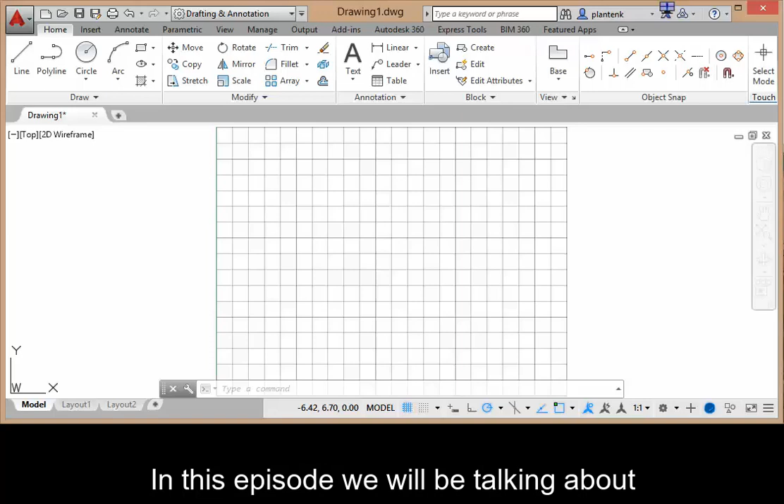In this episode, we will be talking about the difference between absolute and relative coordinates. Absolute coordinates are measured with respect to, or relative to, the current origin, whereas relative coordinates are measured relative to the last coordinate entered via the keyboard or mouse.

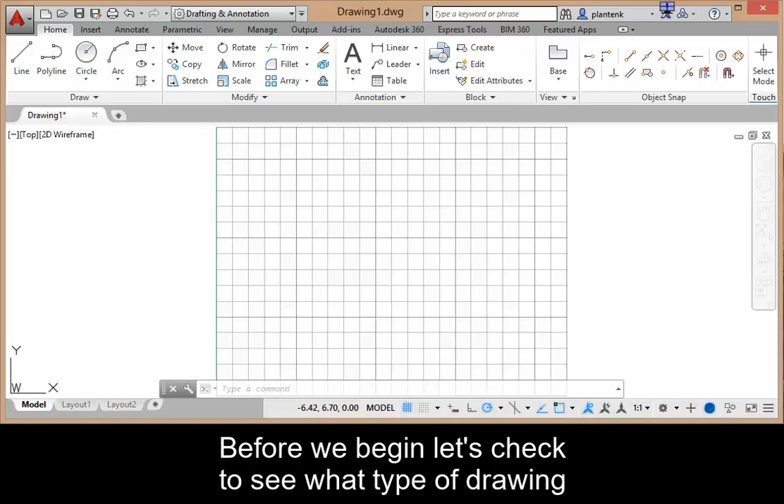Before we begin, let's check to see what type of drawing we are in by using the commands units and limits. Units checks what type of units we are using and the precision. Here we can see that we're using inches and the precision is 2 decimal places.

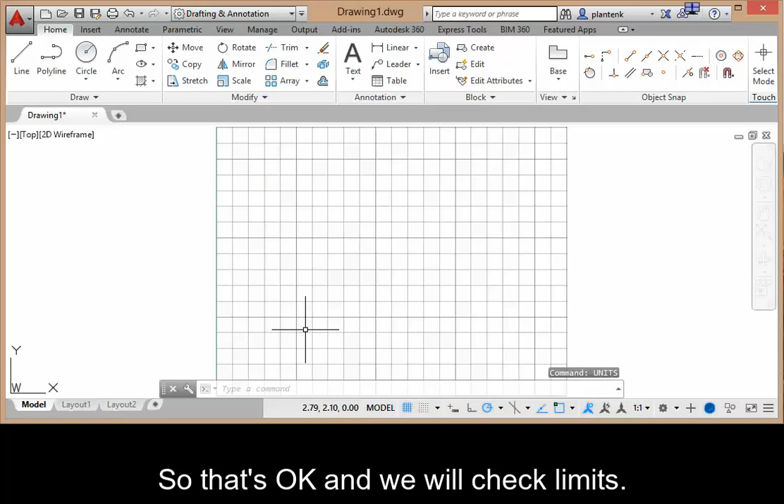So that's okay, and we will check limits. This command checks the paper size, and the lower left corner, that's the origin, so that should be 0, 0. We'll leave that. And this is 11 by 8.5, which is the normal paper size, so we'll leave that.

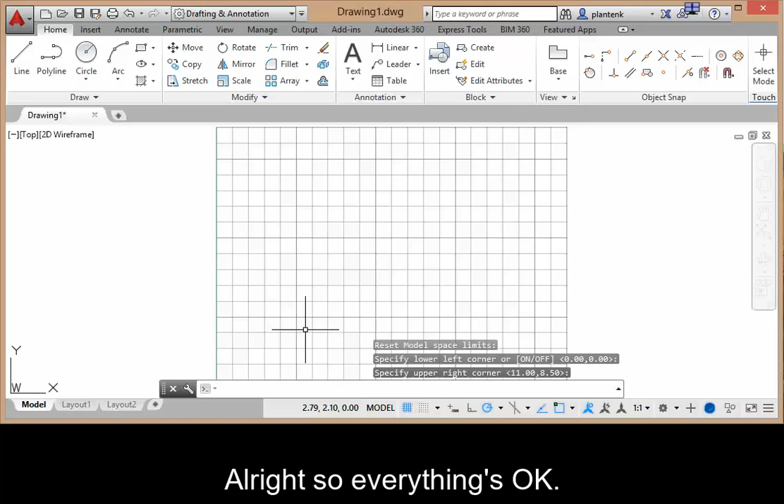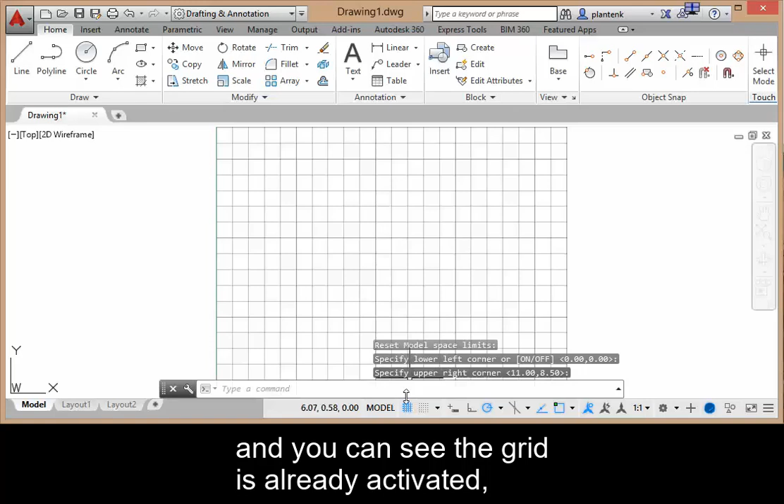Everything's okay, so let's start by visualizing the coordinate plane. AutoCAD gives us the option of showing a grid, which places lines or dots at selected coordinate points. Let's go down here in the status bar, and you can see the grid is already activated. We can deactivate that by clicking on this icon here and activate it again. So you can see here's the grid, and we can change the size of the grid.

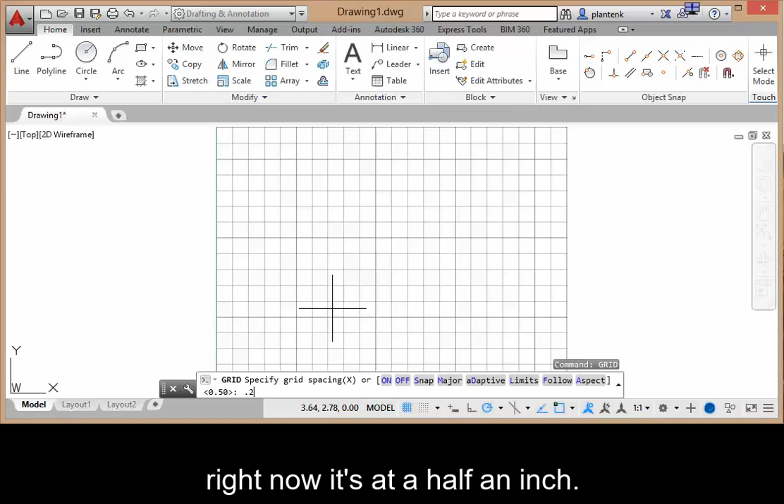I'll just type in grid and choose any size you like. Right now it's at 1/2 inch, so I'll put 1/4 inch, and you can see that it changes size. The status bar gives us a quick way of turning that on and off.

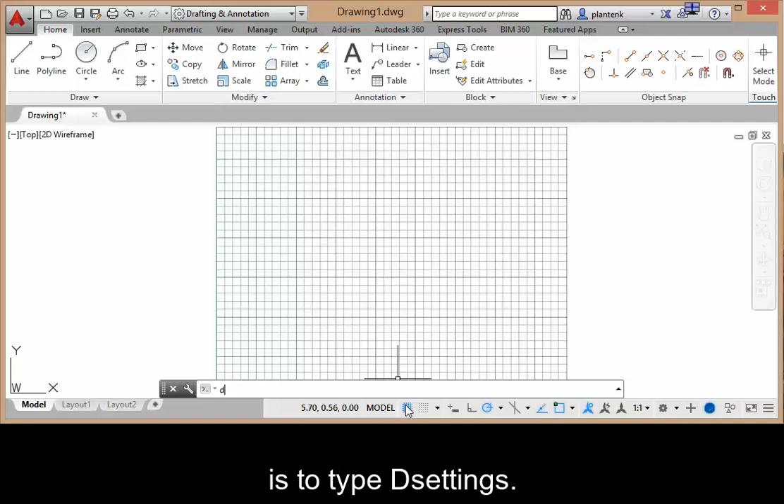If you want to change any of the settings other than the size, an easy way to do that is to type DSETTINGS. This gets you into the drafting settings window, and in the snap and grid tab, you can see there are snap options and grid options.

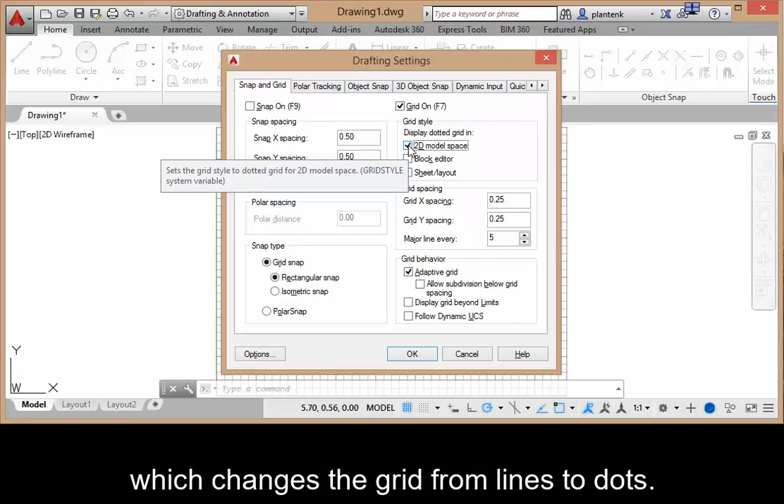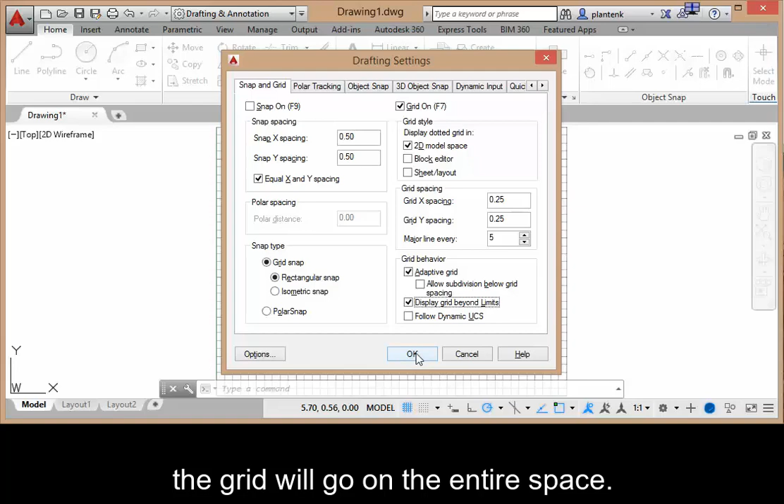This allows you to go to the 2D model space grid, which changes the grid from lines to dots, and it also allows you to display the grid beyond the limits. Right now the grid only goes on the limits, or your paper size, so you can see the grid does not go beyond that. But once we click this to be active, the grid will go on the entire space. I'll go ahead and click OK, and you can see the grid just spreads out beyond our paper space.

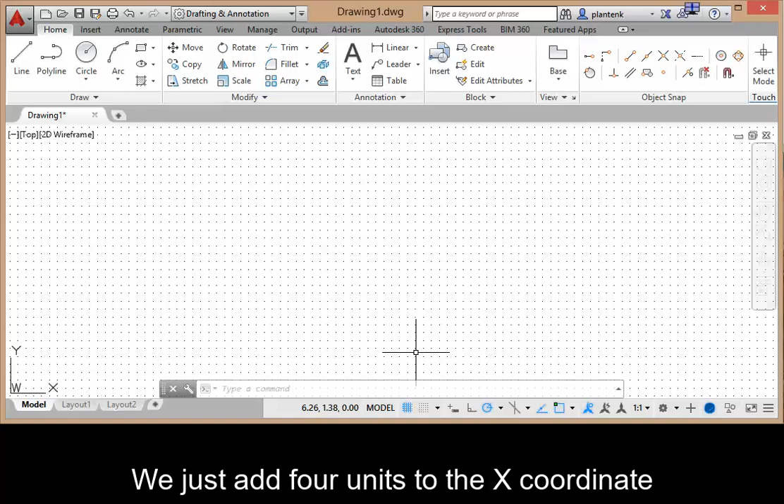Let's move on and continue to talk about the difference between absolute and relative coordinates. Let's say that I want to draw a horizontal line that is 4 units long. If I start the line at the coordinate position 3, 3, then it's easy to calculate what the endpoint would be. We just add 4 units to the x-coordinate, and the endpoint would be 7, 3.

So let's go ahead and do that. I will draw a line. My first point is going to be 3, 3. And the last point will be 7, 3, giving us a line that is 4 units long.

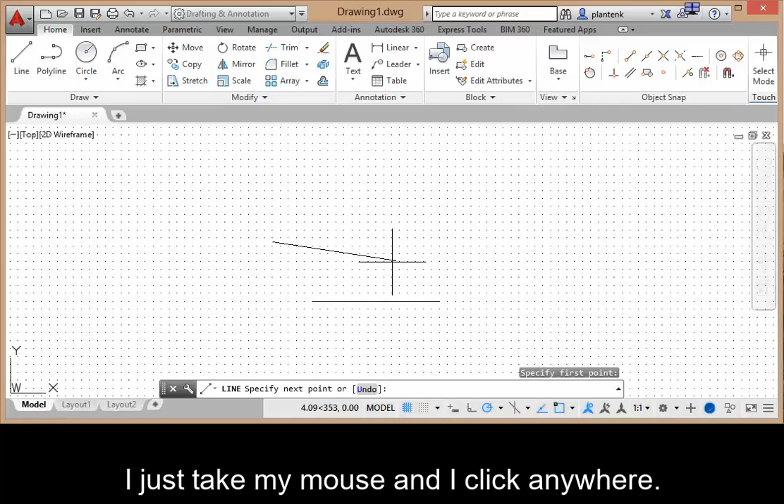But what happens if I don't know where my line starts? I just take my mouse and click anywhere. Now I have no idea what the end point should be, but I still want the line to be 4 units long. This is where relative coordinates come in handy, because now I want to draw something relative to my last point entered.

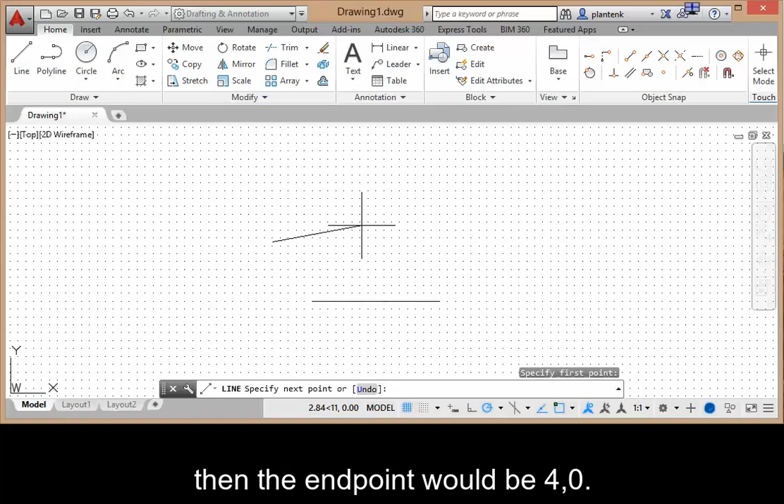So if it's relative to the last point entered, then the end point would be 4, 0 -- 4 from the last point. But how do I let AutoCAD know that I want it to be relative to the last point entered and not to the coordinates? We use this handy little symbol, at, the one above your 2. That tells the program that it's going to be relative.

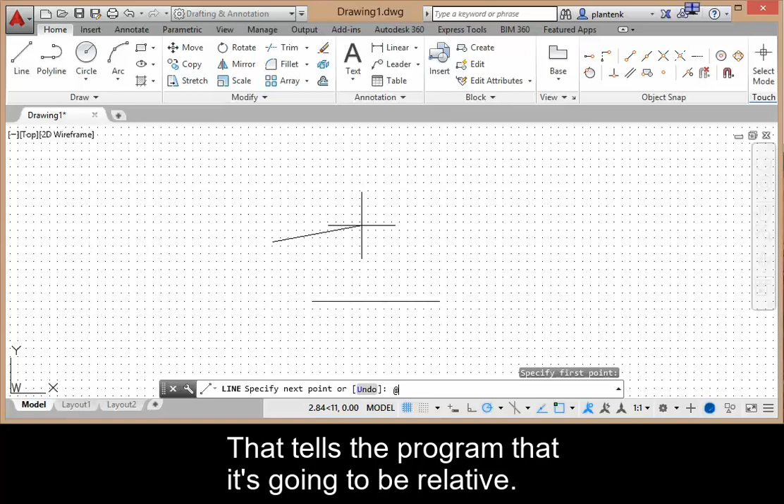So now I can just go 4, 0, and that gives me a relative coordinate, relative to the last point.

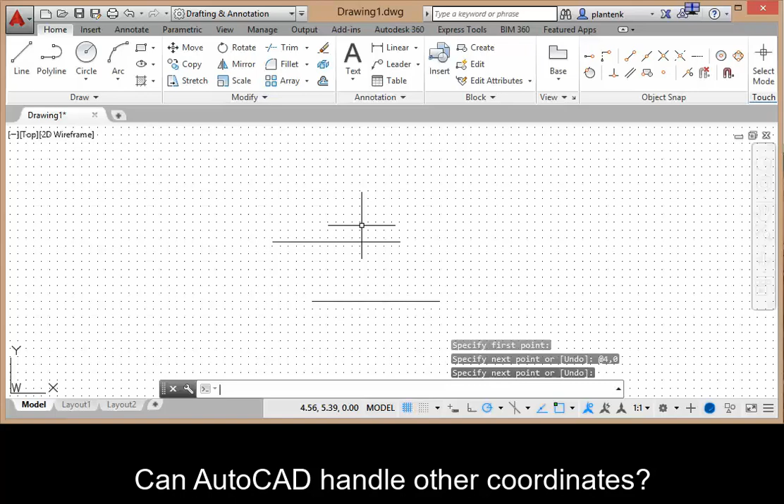Now we've only been dealing so far with Cartesian coordinates, x and y. Can AutoCAD handle other coordinates? It can. It can also do polar coordinates, or r theta coordinates.

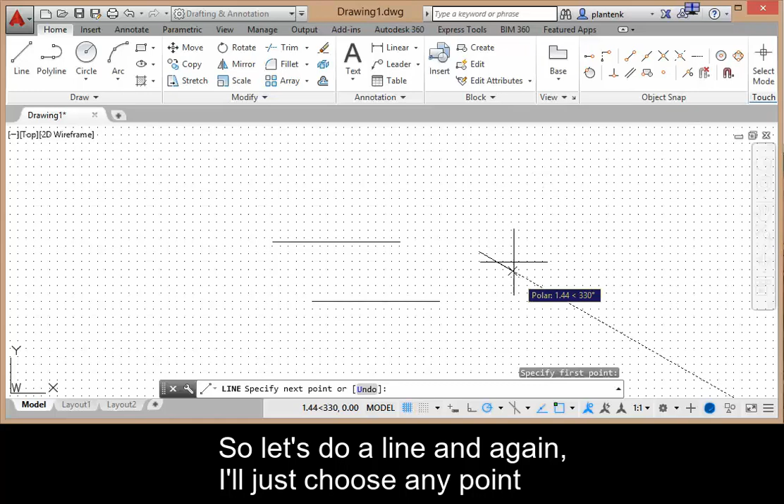So let's say that if I want to draw a line that's 3 units long at an angle of 30 degrees, I can do that. So let's do a line. Again, I'll just choose any point because I'm going to be relative to my last point entered. And again, I'll give AutoCAD that little cue that it's going to be relative, so the at symbol.

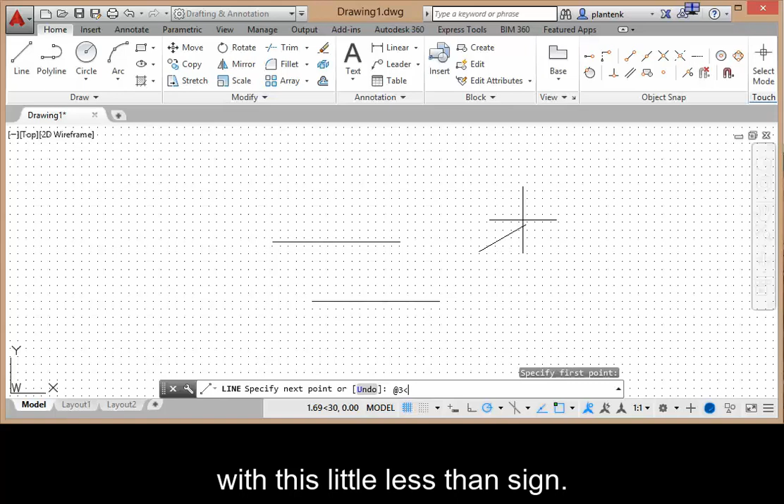And I know I want it to be 3 units long, and I want it to be at an angle. I'll tell AutoCAD I want it at an angle with this little less than sign and 30 degrees. So that's how you do polar coordinates.